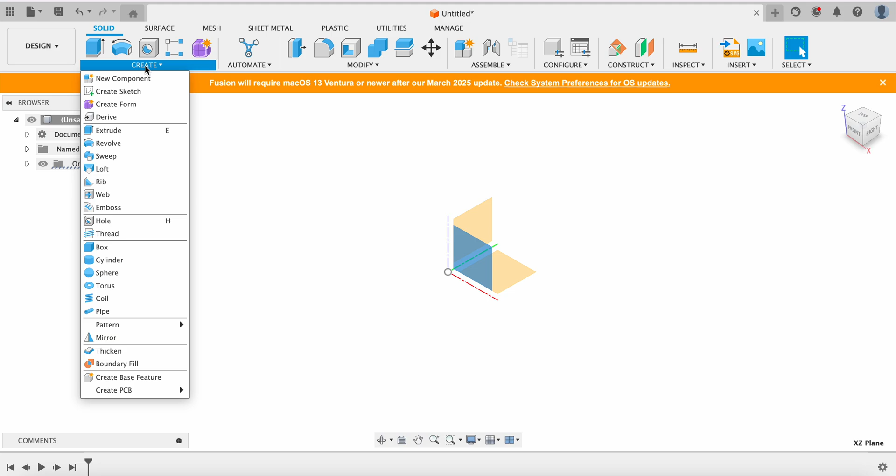Character that's kind of based around a Lego character.

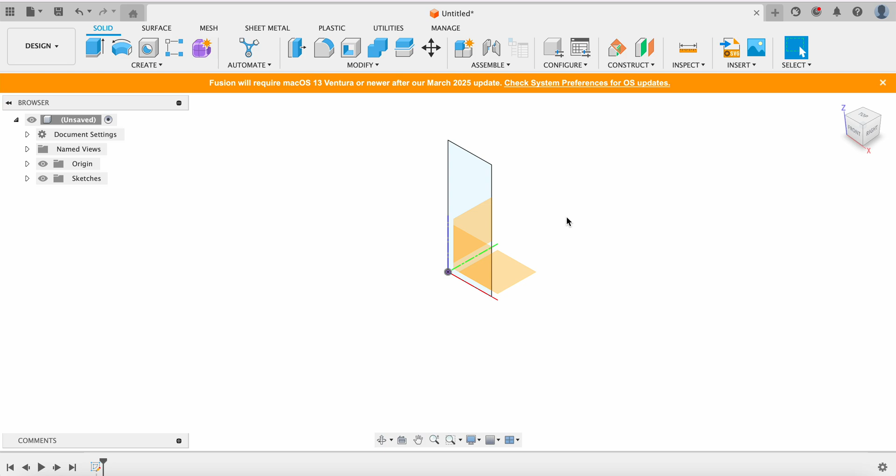First things first, we want to create a boundary. This is just a nice way to make sure that you're within the maximum that we can give you for the mold. So the max is 30 by 80. You may want to go smaller than that, and the easiest way to tell is we've probably gone online or from your drawings, you have a pretty good idea of what the proportions are.

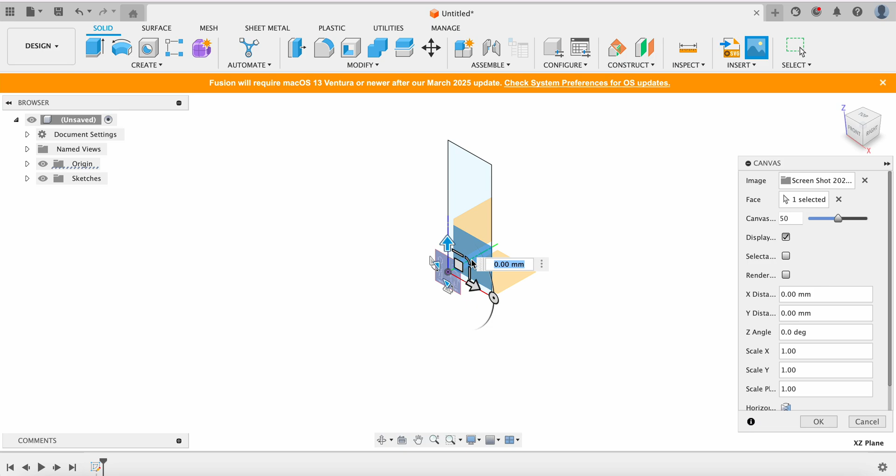The way that we can insert those drawings will really help you, and that's called Insert Canvas, which I've just clicked here. You can slow the video down if you need to, just remember it can be slowed down. So we can use either one of these characters. I'm actually going to use this one because it's going to be easier, since we're going to use this for both sides.

First things first, we're going to get to where we can see this thing. We're going to move this so that it's sitting nicely here, and then we'll scale this up so that it fits relatively to the maximum of what we can fit. So we'll do something like that. Remember, this has to come out of the mold in one straight shot. This should be fine for what we're using it for.

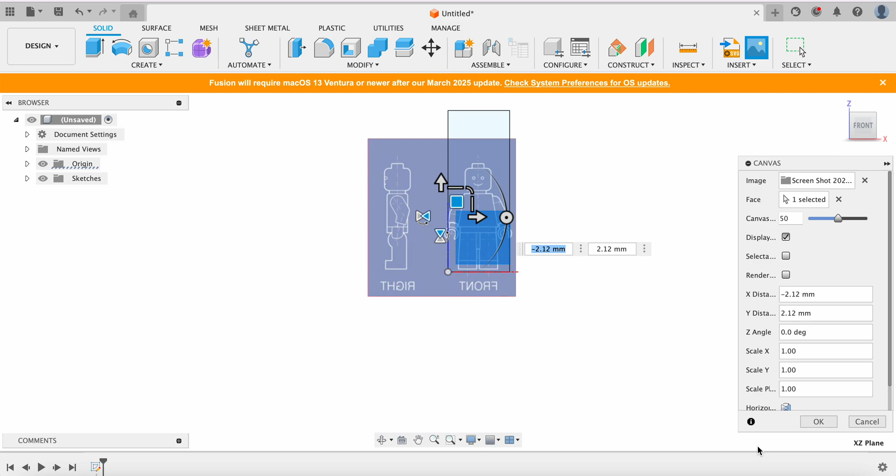So we're going to draw first from this side, and then we're going to draw on the other side. So we're going to sculpt this thing. Now, what we want to do is break this down into pieces.

First things first, we could start from the feet. Remember, this does have to come out of the mold, so things like these little clampy hands are going to have to get closer, because when it comes out, it has to be more of a cone shape, or else it'll get caught with these things called undercuts, and you won't be able to get the mold out very easily.

So we could start with this, and you could do it a few ways. If we look at it from the side, you'll notice there's a little cutout here for the leg. You can choose to make it like this, but in general, I would recommend keeping it straight all the way down, because these little undercuts will come out, but we can always make those cuts later.

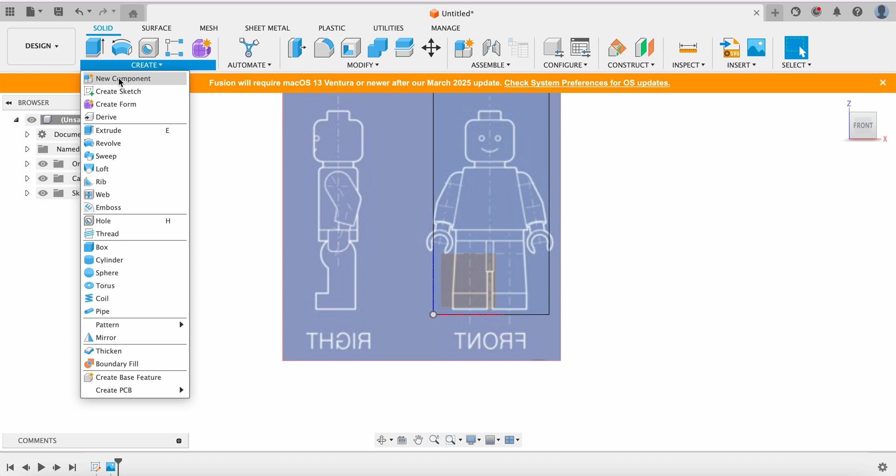So what I'm going to do is create a sketch on this plane, right where this guy is, and draw in these legs. This is going to be the first thing I want to keep separate, and I want to keep all these pieces separate because I'm going to make cuts to them, and I don't want to worry about it cutting out other pieces. Like I said before, you're going to want to make sure this is one piece, because we're going to cut it out and deal with all that later.

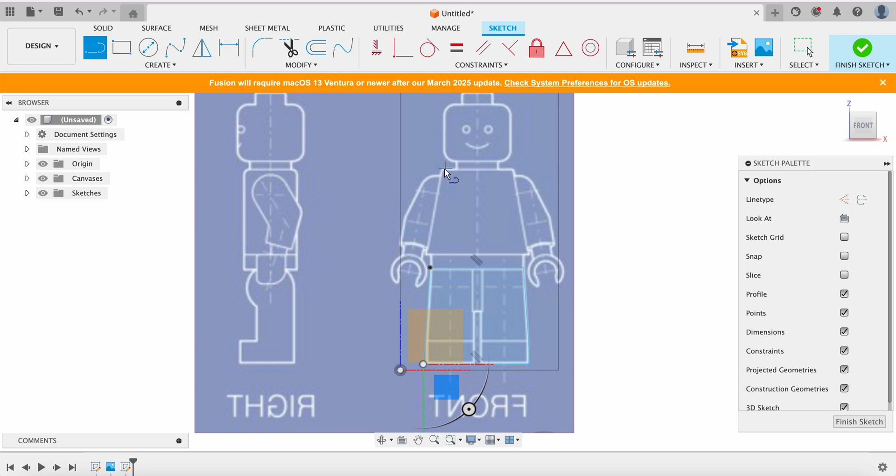So we got that, then we make this kind of general triangle shape right here. You got that guy, that'll be easy enough. And then this little rectangle thing right here, that'll work. If you hit escape, you can get out of the tool so you can move it, it's easier. Yeah, that should be fine.

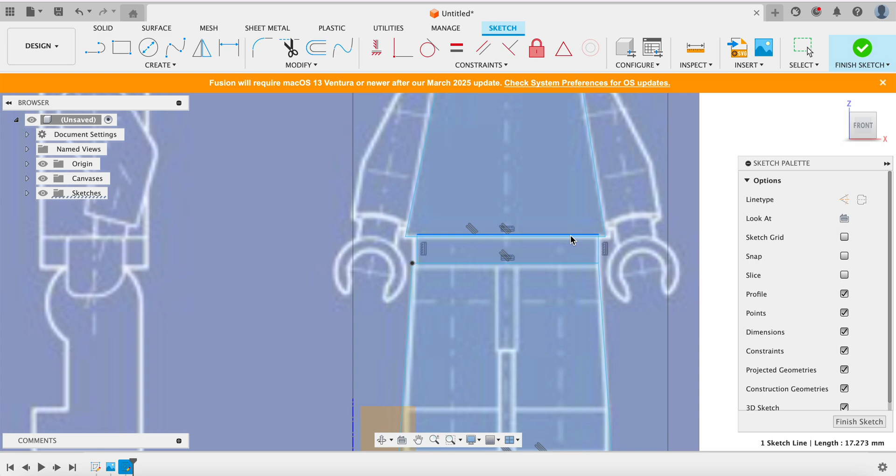So we have our general shape, and you know what I'm going to say? I'll try and show you how I would maybe approach this, and you can change it as you want. This is yours. I would say the easiest thing for any of these is just to connect the whole shape and then cut it out later.

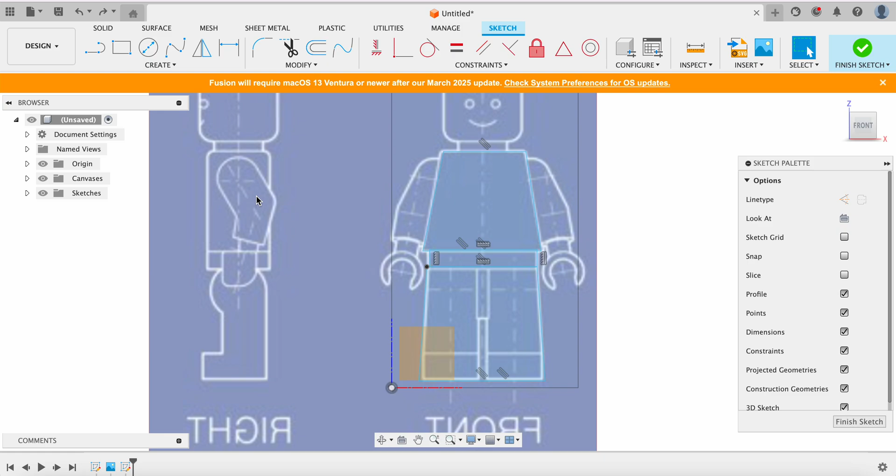This has it mounted on the side though, so we're probably going to want to make that actually afterwards. So I'm going to get rid of that, and we're going to want to add that on. That's going to be easier to draw from the side and then cut it out this way.

And for this one, we're not going to use a revolve. So I think that's good. We'll start with this base, and we'll just extrude it, and then we'll cut it so it's the right shape. So for the extrude, let's go here. Oh, I might have to hide the canvas for a second. Oh, it has our original sketch too, I'll hide that.

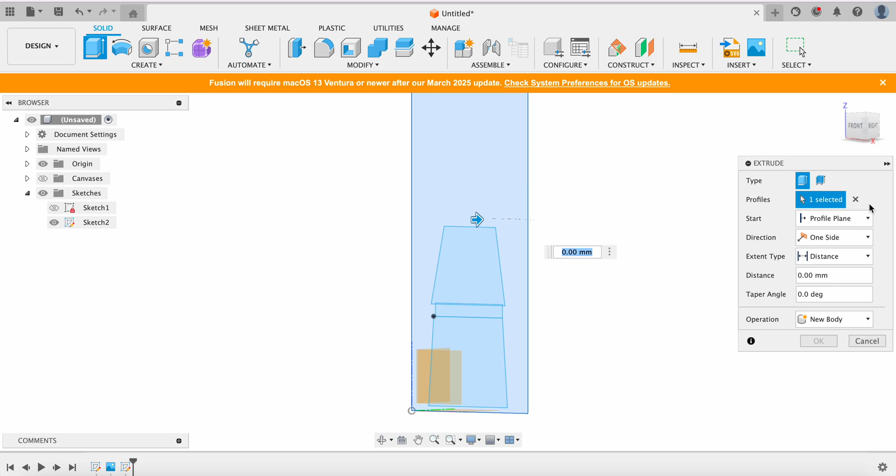That way that goes away. So we'll just extrude these. Right there, you're going to notice there's like a little gap. We want that as well. So when we extrude this, it picks up some of that, and that's going to make it easier for us, because then we don't have to add a whole ton of stuff. We want to make it relatively bigger, because we can always remove material. It's much harder to add it and get it to look seamless. So I think that's good right there.

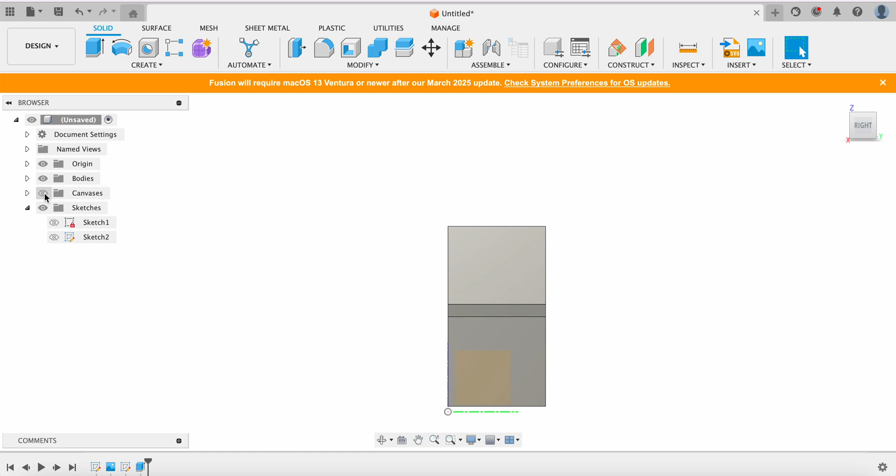We'll put the canvas back on and just kind of compare it. But it looks pretty close to what we're going for. So you have the first piece.

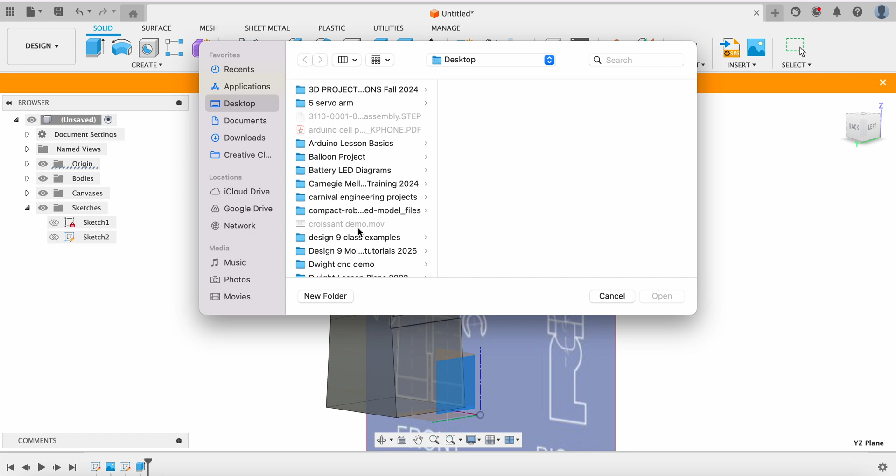Now the next part of this is going to be cutting it from the side. So what we want to do is draw on this plane right here, and we're going to insert another one of these. In this case another canvas will get inserted, and it'll be the same image, because we found an image with both side views. And again, this is going to be your drawing when you do it, so easy enough.

But I want to do this so that this matches up. We want to make sure that his feet, or their feet, go here, and this is where this top piece ends. So we have a little further to go.

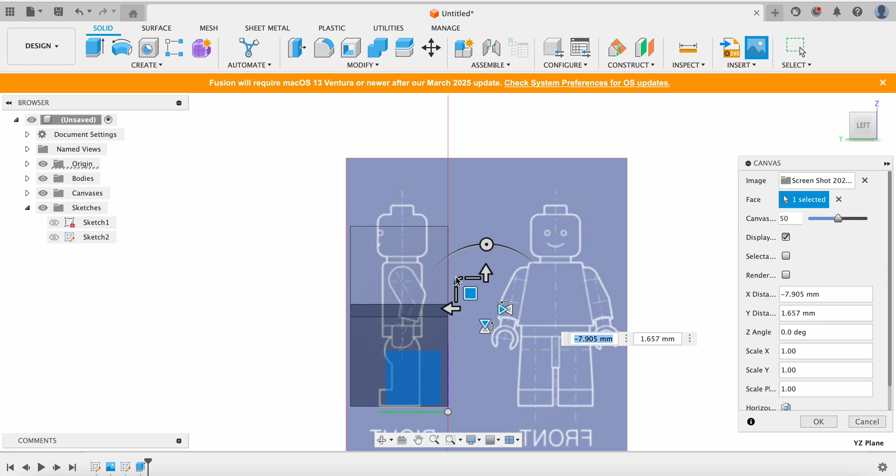Something like almost that. We'll just make this a tad bigger. Yeah, something like that. Smaller actually. Yeah, so there you go.

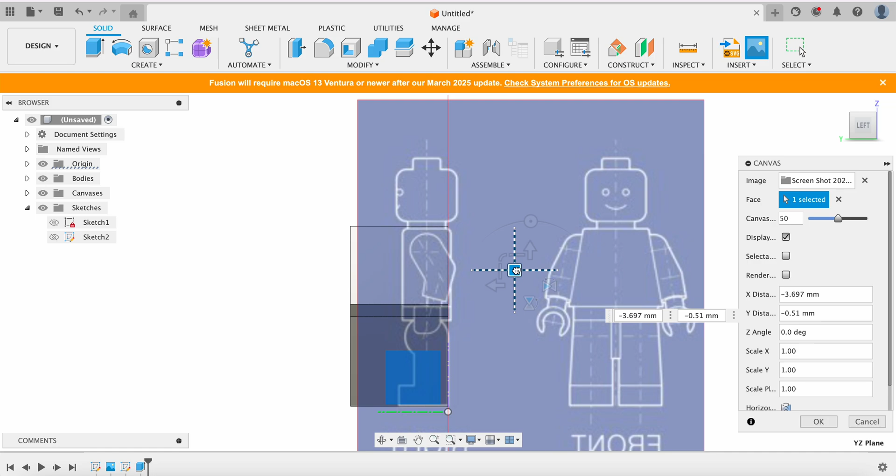So we'll put this here. I actually like to scoot that all the way back because I'm not trying to cut out a whole bunch of new stuff, and we'll keep it there. So we got this, we have the front view, we have this piece. So now we're going to just trace what it looks like here from the side.

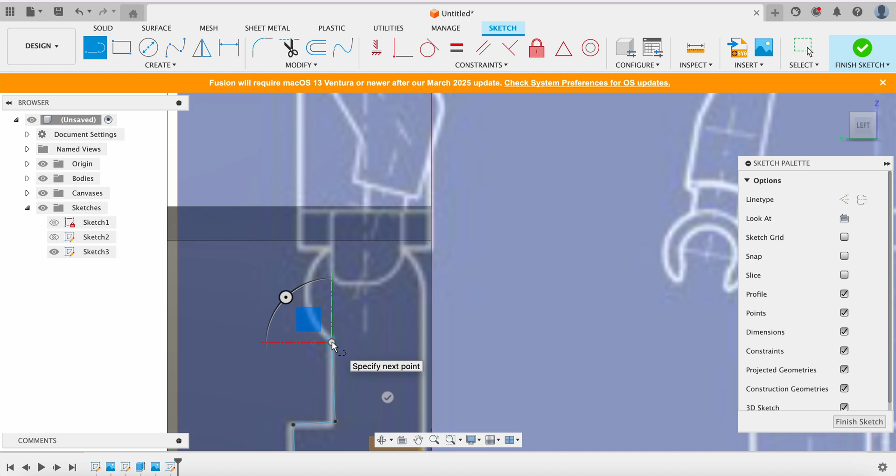So the easiest way to do that is to go over right there and just make the cutouts that we want. If you can't see or you can't click, or you're starting to click that little navigator, don't worry, you can do that and then just click this little check mark. And then in here you have tools like arc. I would use the arc 3-point for this one because you know it's going to end right here for the cutout, and that'll just make it easier for you.

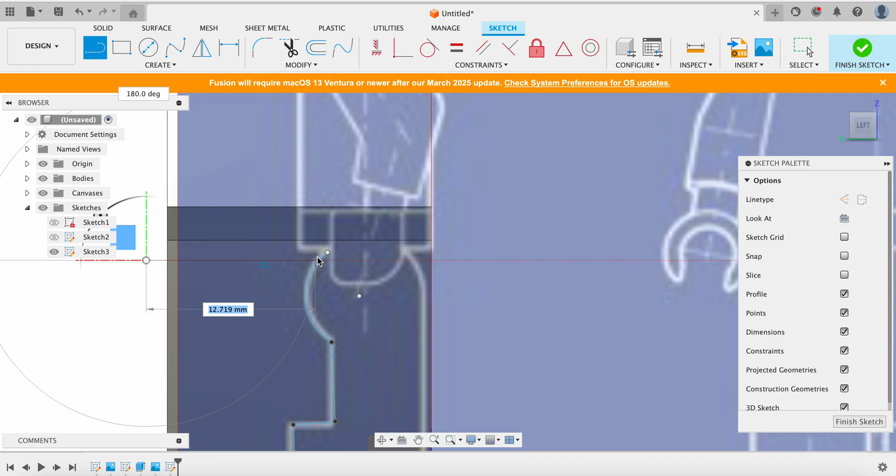And then over here, you're going to have this slight undercut, but that should be okay. Just remember, if you have anything, it definitely picked up something there. So if it's having a problem like that one, just connect it outside of this. It'll be so much easier. Then hit escape and you can move the thing into position. That's just going to be an easier way to draw that, because you don't want it to accidentally go off the plane.

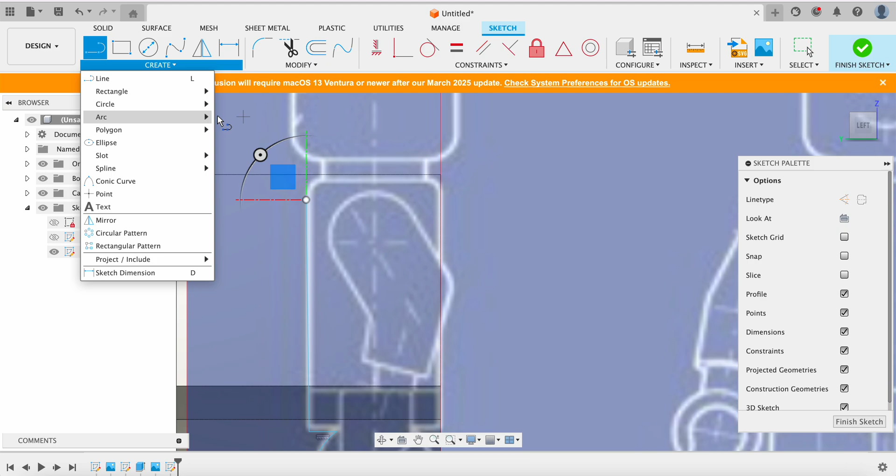So for little things that are rounded, you want to hit the check mark there. But for these little rounded pieces, it's actually easier if you add the arc right here on the edge, because then you're not going back in and filleting things and worrying about it. So you have that little arch that's already built into it, and then you can chop this thing up right here.

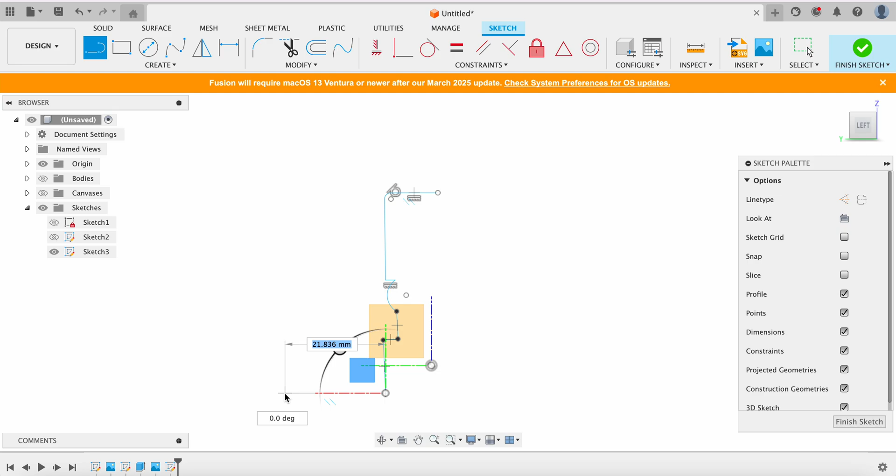That's great, and yeah, so we'll zoom out. If I hide the body and hide the canvas, you'll see that this is kind of not completely blue, and it's not a cutout. So what we want to do is make sure that we have this whole thing like a cookie cutter, so we have this whole piece go all blue, and then we turn everything back. That way we can see, okay, it's going to cut out all this stuff.

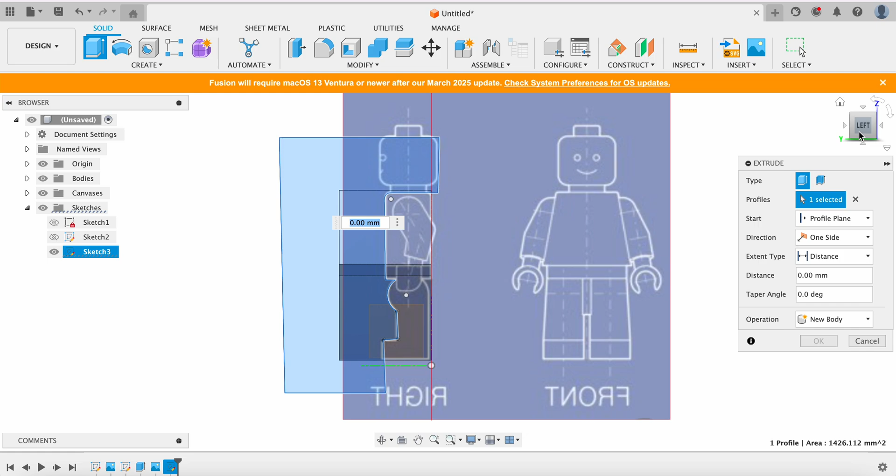And sure enough, you'll only know once you start extruding it. So, yep, look at the body, look at the canvas, and then we'll do the extruded cut. So we have this, and we're going to extrude it through our body right there. So that should do it. Let's see what it looks like over here. It looks pretty good, and we'll click OK. Yeah, sure enough, it looks pretty decent for the beginning.

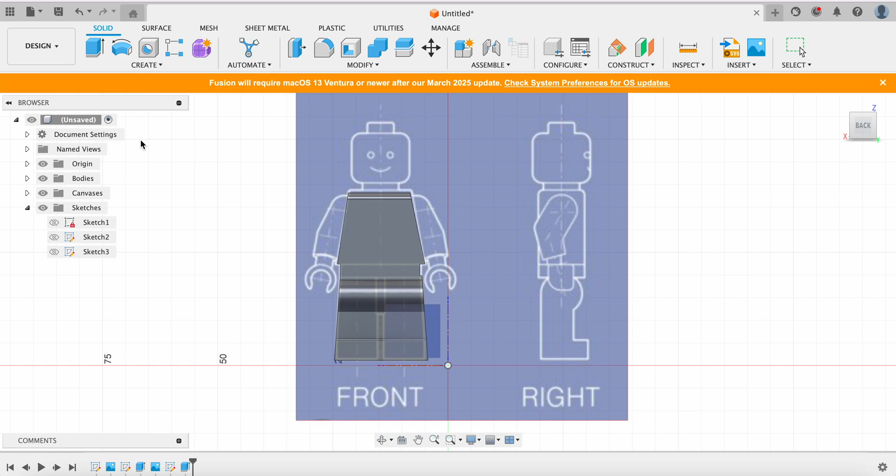You will want to add something just to show that these two legs are there. So I'll show you what I mean by that. So right here, you'll want to draw again on here, just sort of like where the demarcation is for the legs. That way you can at least tell in the mold like, oh, there were two legs. So I'll just do that. There you go. And so now you have two legs. And yeah, so simple extrusion, you got most of the body there.

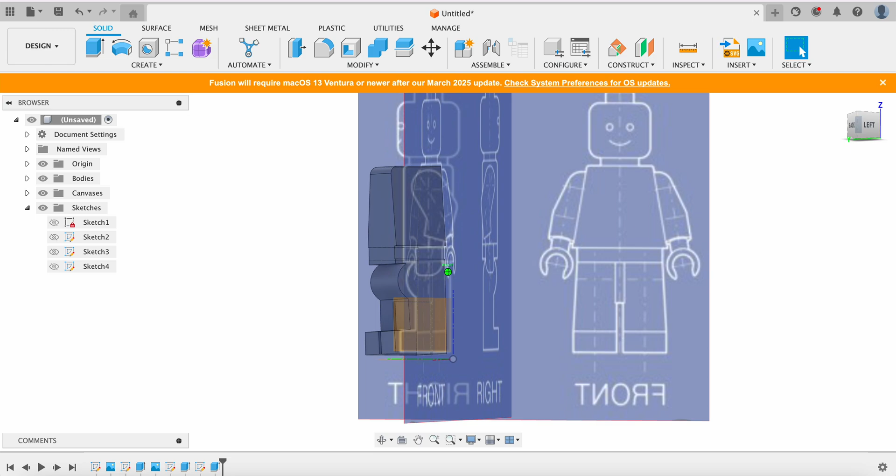And then like I said, we're going to make these arms. So I'm going to draw them from the front. No, I'm going to draw them from the side, right? Because we want to have that piece. Or, you know what? No, I'm going to draw them from the front and then cut them from the side. You can do it a few different ways. Especially if you were making this like a real toy, you'd want the little pegs in there and stuff.

But for what we're doing, we need it all attached because that's going to be the only way we can really mold it. So I think it's best if we actually draw this thing on this plane and then chop it up. And we're going to make it new bodies. That way when we chop it up, it's not going to affect this stuff, so we can separate it. I'll show you what I mean by that.

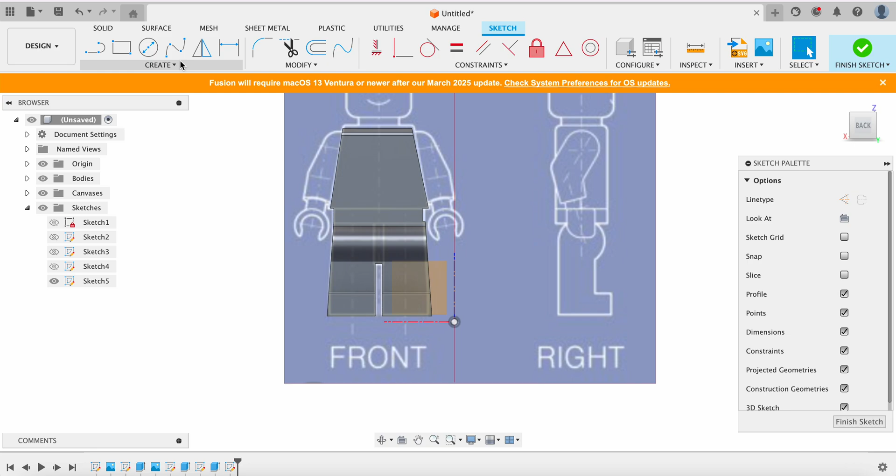So you're going to just make one arm because we're going to mirror it. And we're going to just draw sort of this spline line. It's going to be the right shape. Then click right here because it's going to get trickier to make it there. I actually think the arc tool is probably your best friend there. So that way you can say, hey, I want you to go to here and then curve. See, so much easier. Yeah, that looks good.

And then over here, you'll just want to make a line from there to there. That'll make that solid. So that turns blue. And you hit escape so you can get out of the tool. And you come over here. So it's like right on almost the edge, but not quite. You will want these to be together, but like I said, we can move that afterwards or do something else with it. And I don't want you to worry about that as much.

And then over here, these little claw hands are actually going to be the hardest part because these would be a real undercut. So this is where you're going to have to make some artistic... I don't know how to say it best, but basically you're going to have to make it how you think you can get it done efficiently. I'll explain to you how the mold works.

It's a single part. So think of it like anything touching the base is going to come out easier. Anything in a straight line is going to come out easier. Anything else is going to be an uphill battle. So that just means if it's not closer to the body, it probably won't mold well. It'll rip the mold when you take it out. The whole thing will just be not as fun.

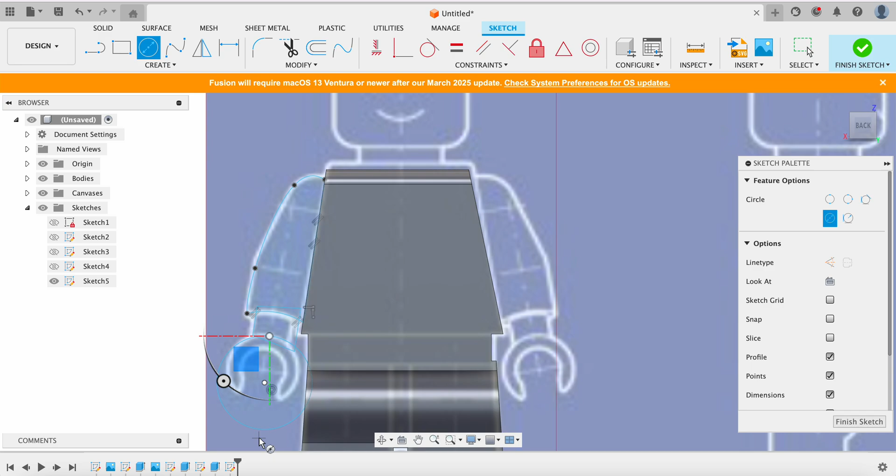But for the sake of argument, I'm going to show you like you could just use this ball as a hand and then chop it up afterwards. And the way you would do that is, you'd make like this cutout or something by making two circles. So if I have these two and I move the circle in here, for example, I can shrink this. So it's going to be like, maybe like that. And put it like there-ish.

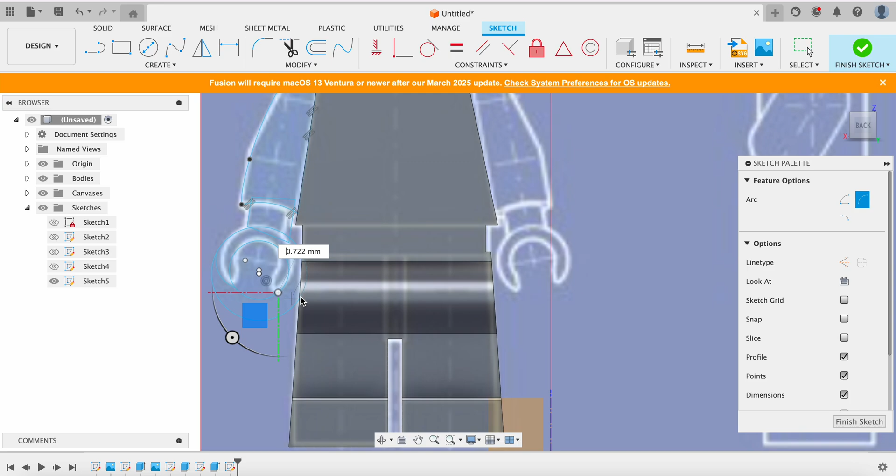And then I just have to make those arcs. So the arcs are like these 3-point arcs, wherever I want it to curve. So I can go here, I can go there, I can make the arc. Same thing over here, and I can make an arc. So, all right, let's say we extrude this and we see what we're working with. So go into extrude, click here, click there, click everything you want to keep, don't click anything you don't. If you don't like something, don't worry, you can go back and edit the sketch, it'll update as you go.

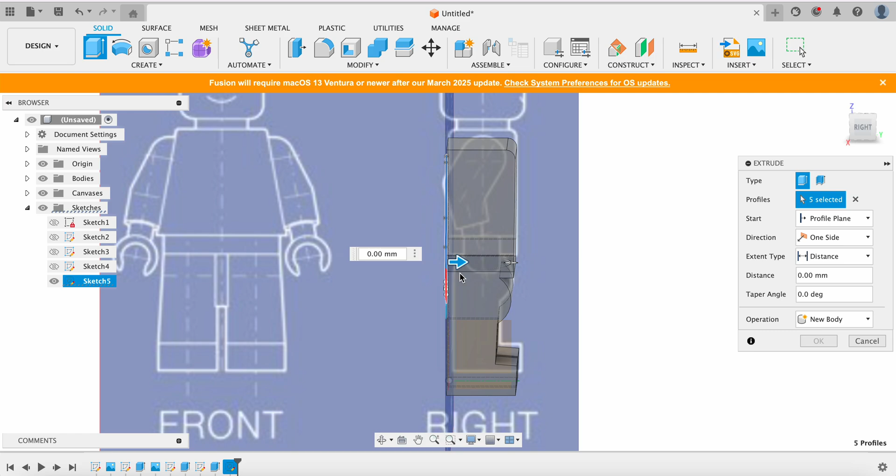And then we want to tell this thing that we want it to extrude, and you have to figure out from where to where. I'm going to have it go to about there, just so I don't have to do a whole bunch of excess cutting. We're not going to cut, we're going to make it a new body, like I said. We're going to click OK. We will look at it, it's kind of like that, that's pretty good.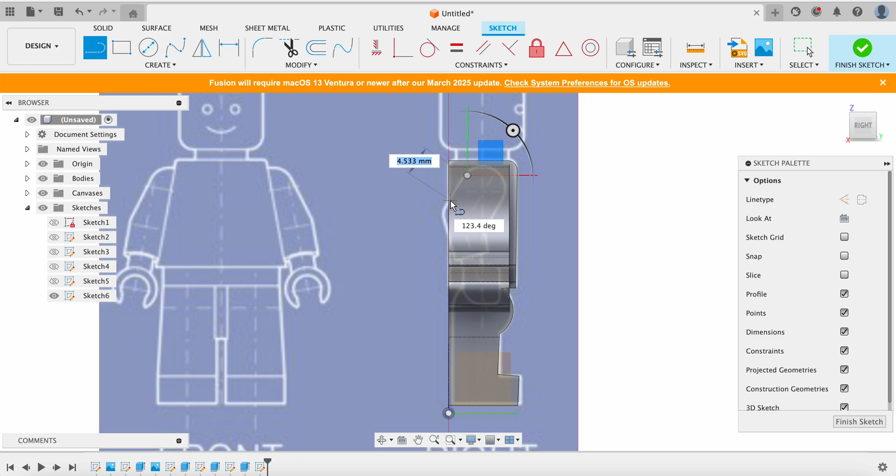And then we're going to draw on this side. So we're going to make a cut right here, we're going to create a sketch. Remember, this gives us the profile. Now, it does have the arm kind of arched, so I'm going to respect that. The way we want to do that is we want to keep it tighter to the body, so I'm just going to move it here, and then I'm going to just sort of trace this thing out.

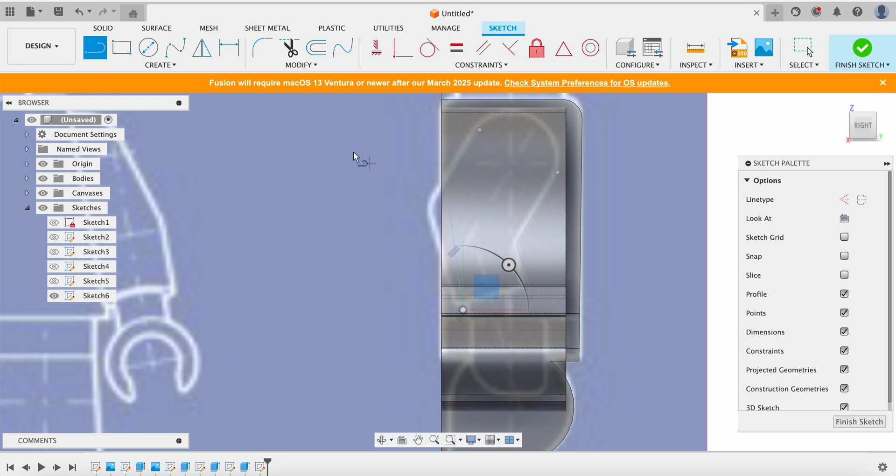So here, let's zoom in. That's what I got so far. Let's move this guy right there, so we at least have the arm just in one solid piece. We'll do the same over here. And I'm just going to do this in parts, okay? Because I can always use this to cut out the outer perimeter. And I can show you can use some tools to get rid of lines you don't need.

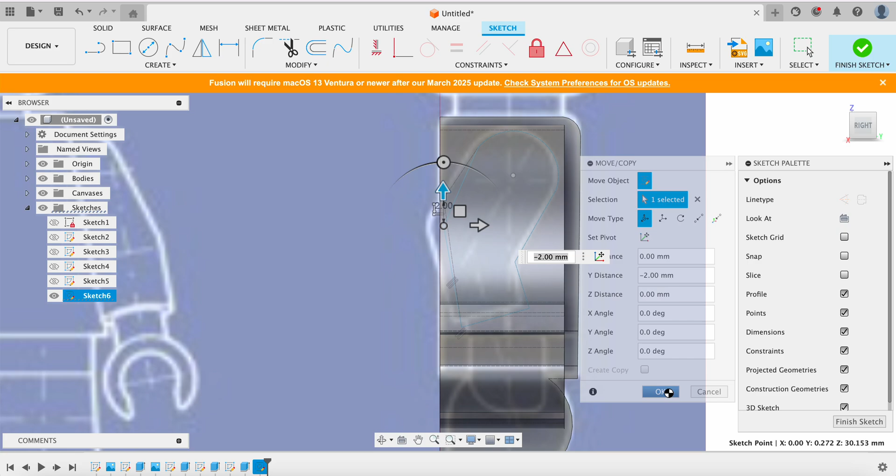So over here, we're going to say this is a 3-point arc as well. It's going to make a little shoulder there. And I don't really like where that elbow is, so just give me 1 second. I'm going to shift this down a little bit further. Oh, now you're going to be like that. Okay. That gives me pause, because that means it's probably a 3D sketch. 1 second. No, that's pretty good. We're just on the wrong side sketching. Okay. Yeah, so we got that.

Now, if you look, the peg fitting here is much further down. So let's take a look here. We're going to want to make this little cup. So let's do that. Come down. I'll just trace some of these lines here and there. And then I will go over here to the arc tool, the 3-point arc tool. I'll go from here to there. That's pretty good. And then I will go up straight, and that will be overlapped.

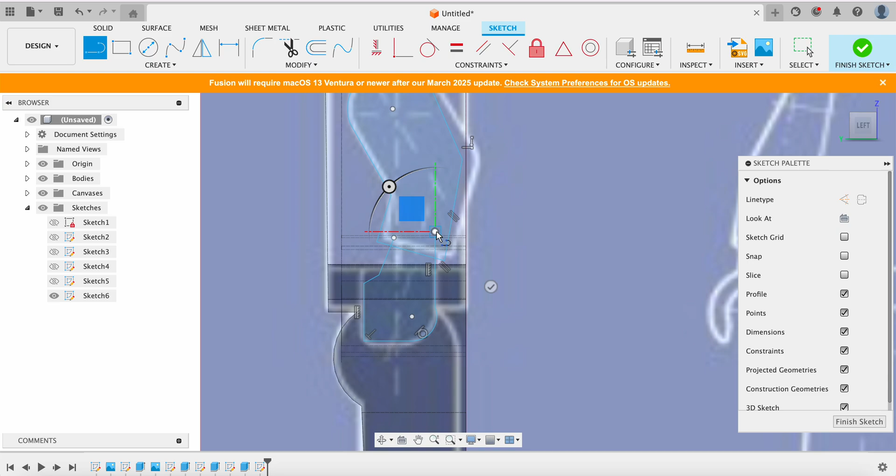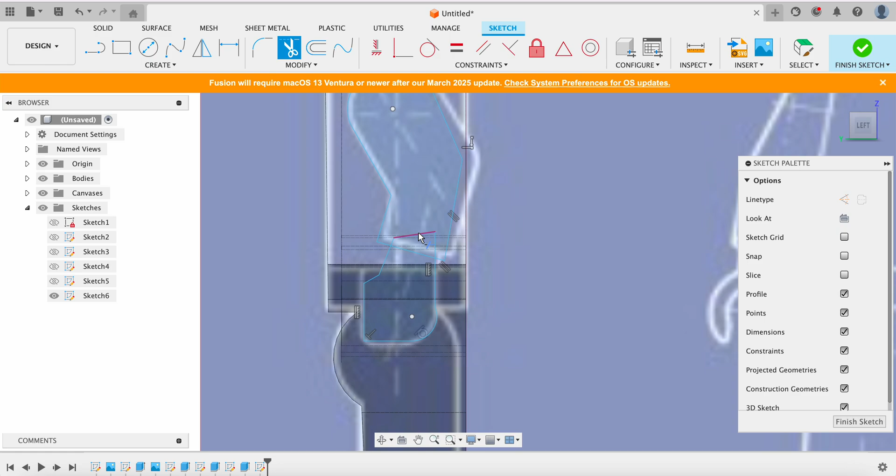Okay. Now, like I said, obviously this isn't going to cut well because we have all these overlapping pieces, and I drew them kind of clunky, but that's okay because I have this tool. This is called the trim tool, and what it does is eliminates lines you don't need so that you can make these into one solid profile, okay? So now it's the right shape, and that's great. It says constraints were lost, whatever. Don't worry about that part because, again, we're just trying to make our sculpture.

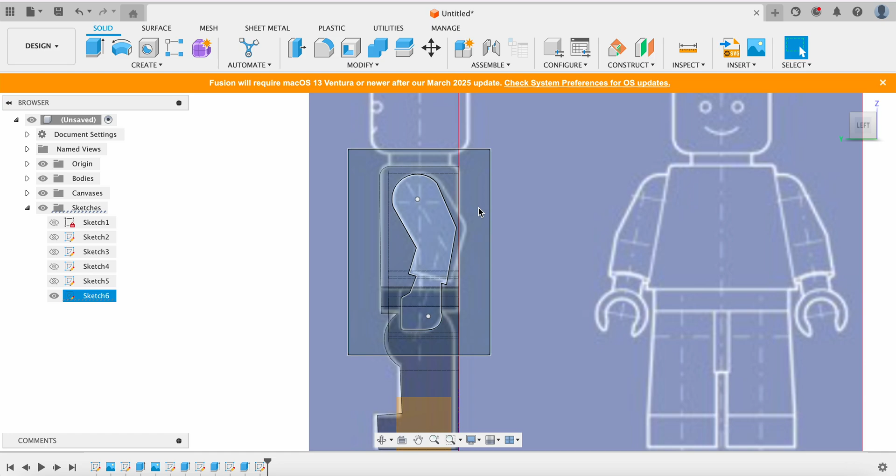Then I make a rectangle over it. The rectangle tool right here is fine. You just want enough room so that when you go to extrude, it has the outside, because that's actually what I'm going to cut away. That's the material I'm going to get rid of, right? And like I said, I want to hide this because I don't want to cut that body. I want to only cut this body.

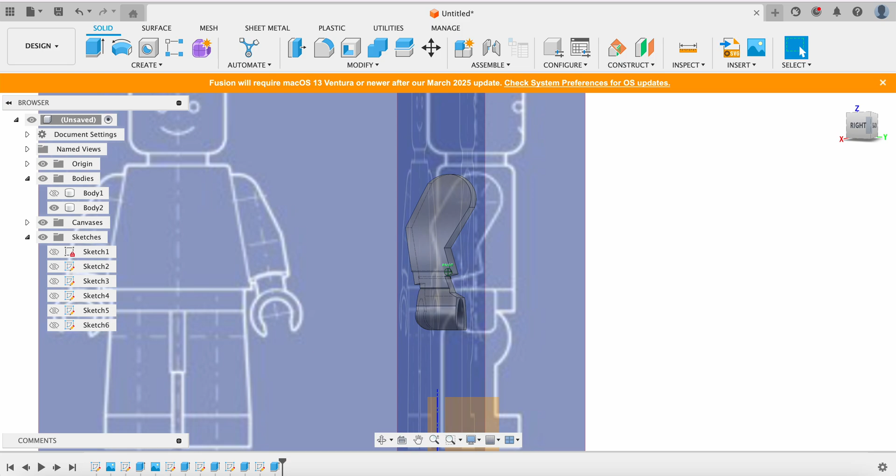So I'm going to go into extrude. I'm going to drag that cutout that I have all the way through here. And I want to show you it's going to pretty quickly devour that piece and make me kind of the shape that I'm going for. Now you can round this out. You can do all kinds of things with this. Remember, the fillet tool is your friend. If you want to fillet it, it can round these things for you. Any of those steps are extra, and that's great if you do it. It will come out better for a design.

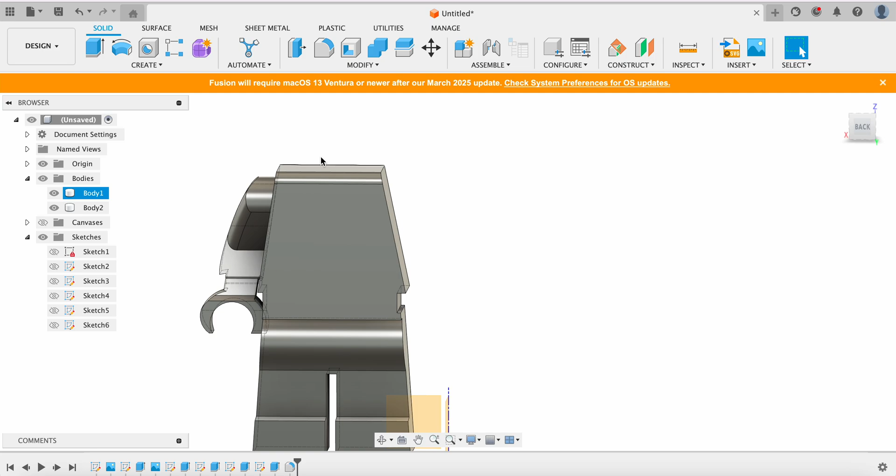And again, you want to look at it with the body and then take the canvas away to make sure you're getting kind of what you're looking for. Now, again, I would not recommend things like these cutouts in the mold, unless you make this thing completely flat, which we kind of are doing, that way we can pull it from the front. If you're doing this 3D and you want to really get the back of his head, you're going to have a bigger problem.

So I'm doing this with the idea that we are not going to basically mess with trying to take this thing out as a 3D shape. We're going to do it as just that. Okay, so that's looking pretty good.

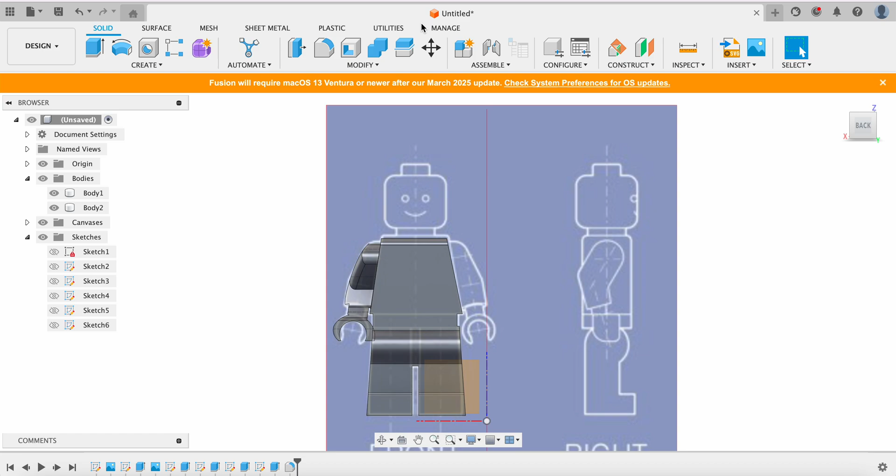Now, you have the option of mirroring this, but you need to make a plane that is in the midpoint of this thing, okay? There are a few ways you can do that. Easiest, though, draw a line. Just come up here. You have this object here. It already has a line, so we don't even need to draw a line. We're just going to make a point. We're going to come over here to the midpoint. We're going to click this and the point, and now we have this reference.

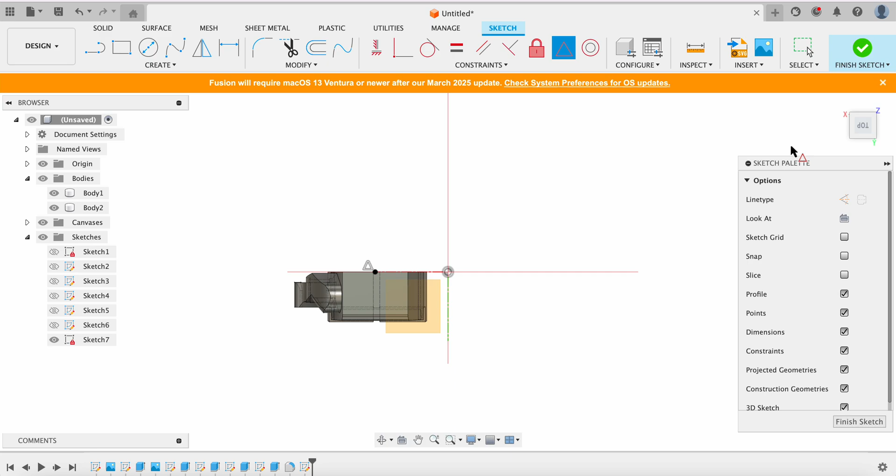That's going to be really helpful when I am going to make a plane that goes right in the middle of this guy so that I can mirror things and so that I can make the head. The head goes really quick, so let me just show you where we're going to use that. So I have the plane already selected, but let's say you didn't. You click right here, and instead of distance, you're going to go to object, and that object is going to be that point. It goes right down the center of that guy.

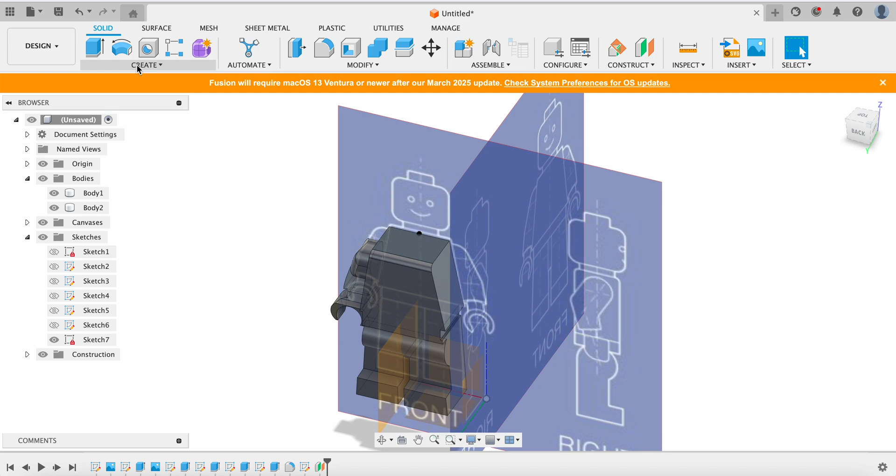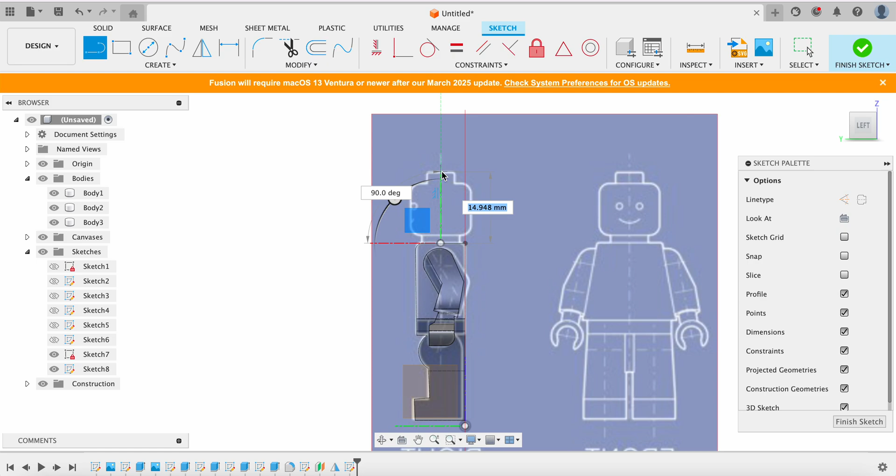And now when I go to mirror, my mirror command right here, I can select this arm, and I can select that plane, and I have both arms. So, makes light work. Now, I can also draw on this plane. I can come over here to create sketch, and it already made me this dashed line, but I'm just going to do it again. We are going to say, hey, this is going to be the axis, and I want it to be about there. Click OK on that one.

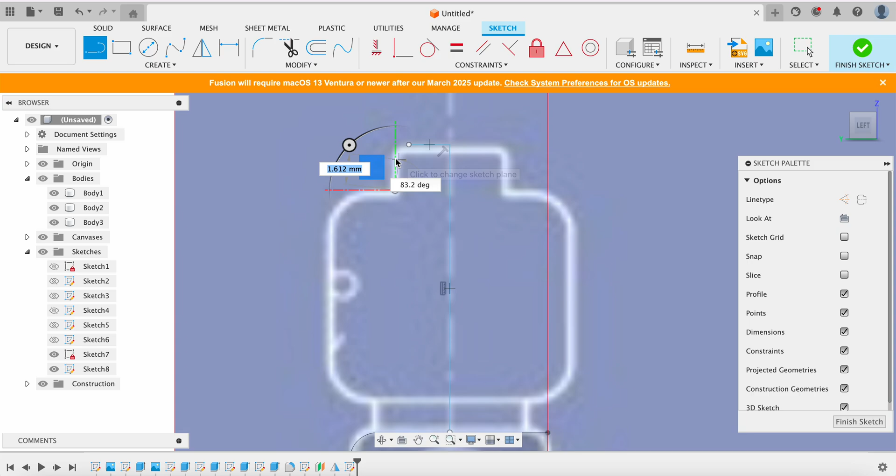And I just have to draw like half of this head. So what I'm going to do is I'm going to zoom in, because this is going to be quite tight. And I'm going to put those little arcs in after. So I'm tracing the lines. Oh, get out of my way. Okay. Why won't you go to 90 degrees? That's weird. I'm going to hit tab and just click 90 because that's annoying. And I'm just going to put this line in. Okay, that's being really, really finicky.

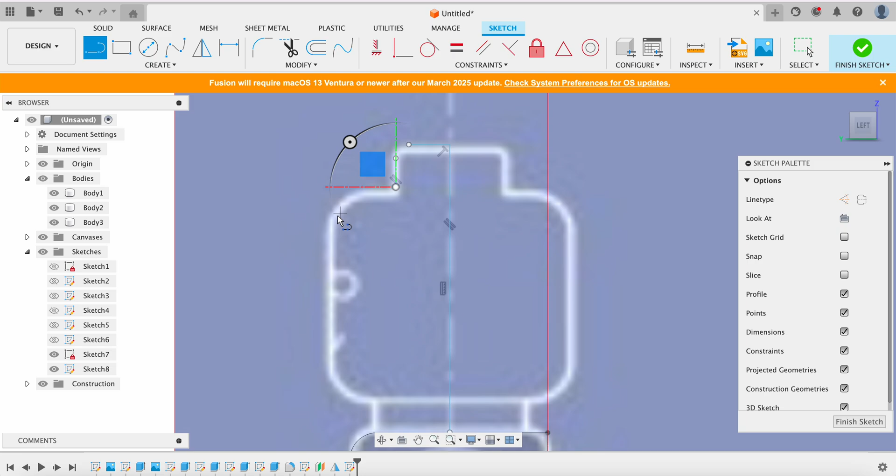So what I'm going to do is I'm just going to draw the line in this direction and then move it because that's just annoying for no reason. And then we'll drag it up. It's not like you have to fight it, you just have to get out of the way. So we'll do that. And then I'm going to draw this front face line right there. And I'm going to draw this one. I'm going to connect that to that. Okay. Yep. And then I'm going to go over here, draw from there to there. Cool. Now, if it's not perfectly straight, don't worry, you can use this tool and it will be.

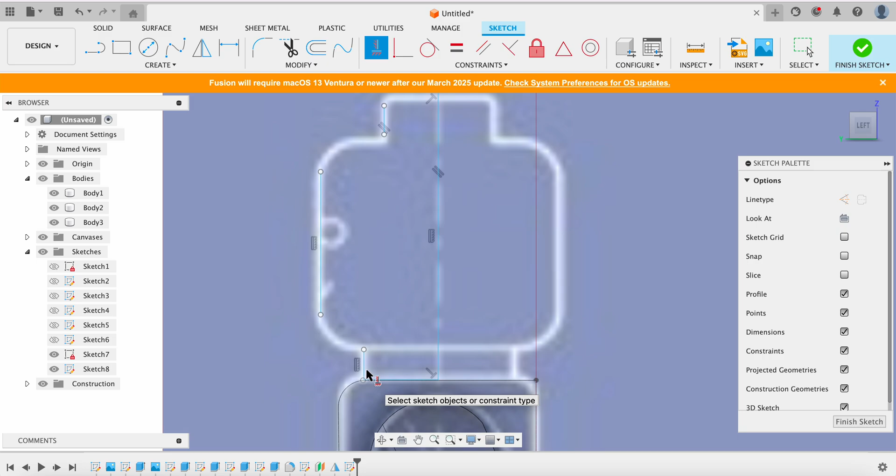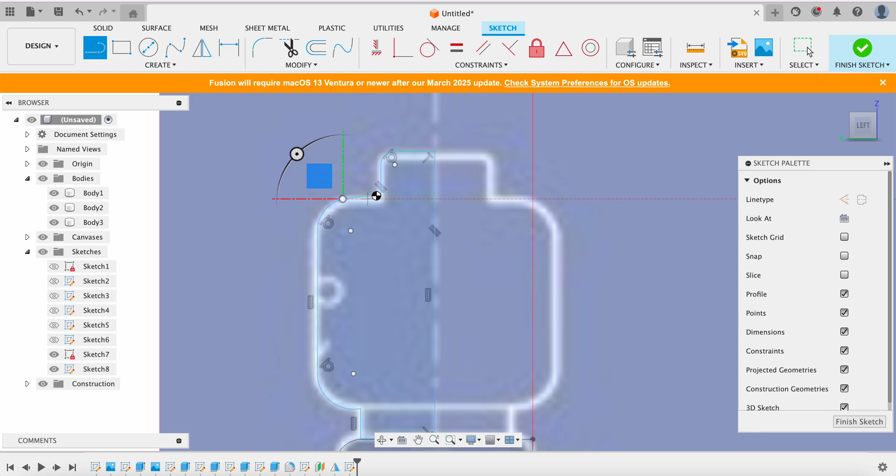And now I'm going to go in with all of those arcs. So I will say, hey, there's an arc from here to here. And there's an arc from here to here. And I need a straight line there, but that'll be fine. And there's an arc from here to there. And yeah, just that straight line and we're done. So I go from here to there. Now, like I said before, if you don't like that, you can always use this tool to say, hey, you shouldn't be there. And it snapped right in.

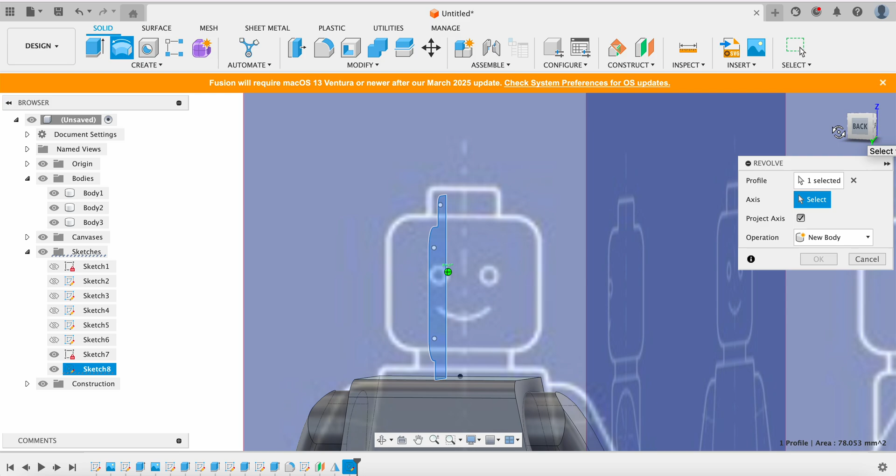And what's cool about this is now I can just revolve this entire thing. If you, for any reason, want to put in a separate piece for that or whatever, you could. I don't recommend it because it won't really come out in the mold if it's too tiny, but it would be a nice accent. So I'm looking at his face, and I have my profile selected, and then it's asking me for an axis. So the axis is actually going to be in that profile we drew. Sure enough, looks like this Lego head. It's a new body. We'll take the canvas away, see what we're working with, and you got a Lego figure. Cool.